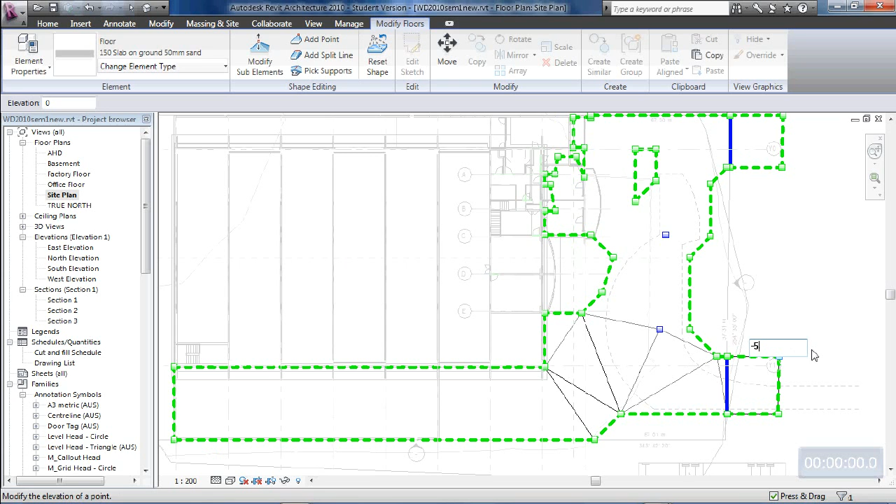I would suspect that the footpath will fall back into the curb of the road to drain water on the footpath in that direction. So just make allowances for that direction to make sure that that sort of happens.

Now, also knowing that this is dropping down a little bit lower, so at this point through here we've got the 99 metre contour, so this is the 98.75 metre contour. We've dropped 250 millimetres at that point there. So this would probably be about a 300 millimetre drop at this point to get to natural ground.

Now we're back on the property, so we don't have to drop by that much actually. I'd suggest that if we're coming at 99 here, you might want to drop down by 100 millimetres or so to this point through here. So I might make that point there a little bit of a drop, but you can make your own decisions on how much you want to fall this. And then we can adjust the earthworks underneath to meet these levels.

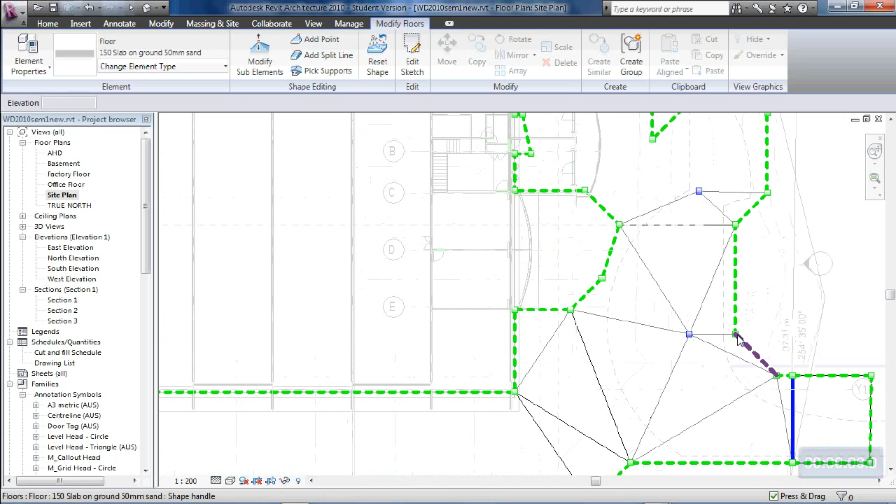So I'm going to carry on and make some changes to these. And the other thing too is that if we're making a change to that point there, then we probably would want this pit to be at least at that level, so the water would fall from the building in towards the pit, and then some of the water can go into the landscaping as well.

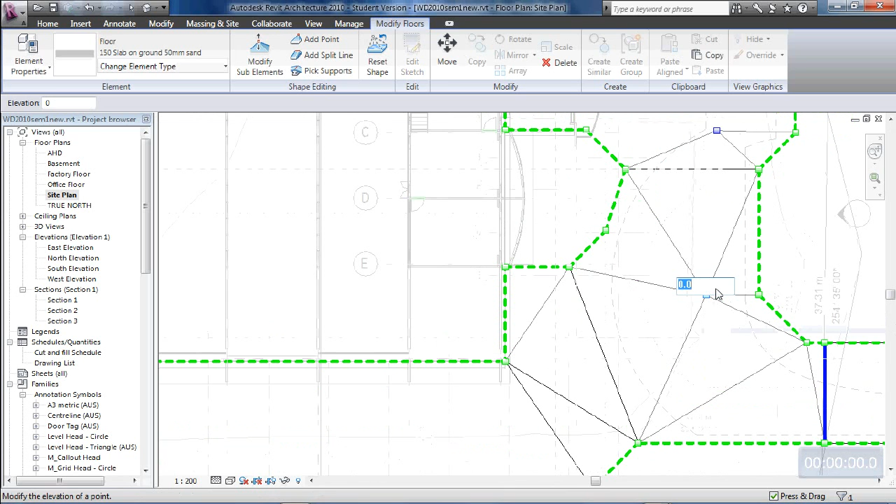So I'll let you make some more decisions about the heights of all those points. I'll pause the video and we'll come back together again to finish off this slab.

Okay, so I've changed all my levels to these points. I just made these couple of points up through here go up to about 100 above, because you can see the 99 metre contour cuts in at that point. So these points here need to be slightly higher to match what natural ground would be at that point. So then I'll drop down a little bit lower to 50 millimetres above, which is quite different to what was going on down here. And so we're just respecting what's happening in the fall of natural ground.

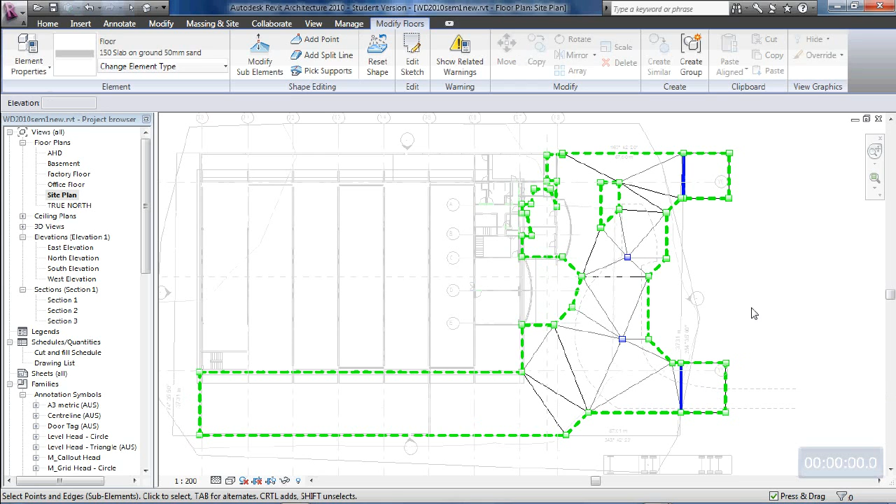Okay, so when you get to that point, you can just back out of all of that by escaping, and you've made those changes to the concrete slab. I'm not too sure if you'll actually pick it up in the 3D view, but possibly you will be able to pick up that this face out the front here is faceted now, and it actually rises and falls in conjunction with those changes that you've made.

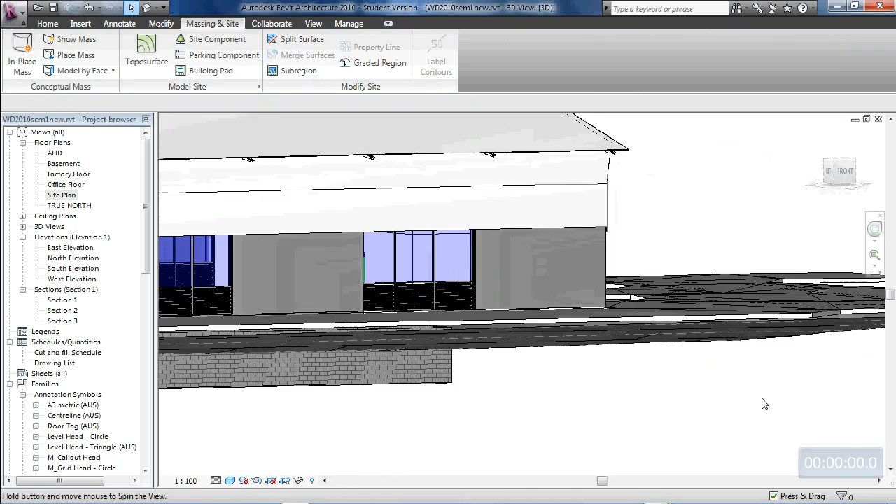These lines that have been created in the slab, we can easily get rid of them for documentation purposes by just using, I think it's under the modify tab these days, the line work tool, and we can pick invisible lines and start making all these faceted lines here invisible. But I'll just leave them on just for now.

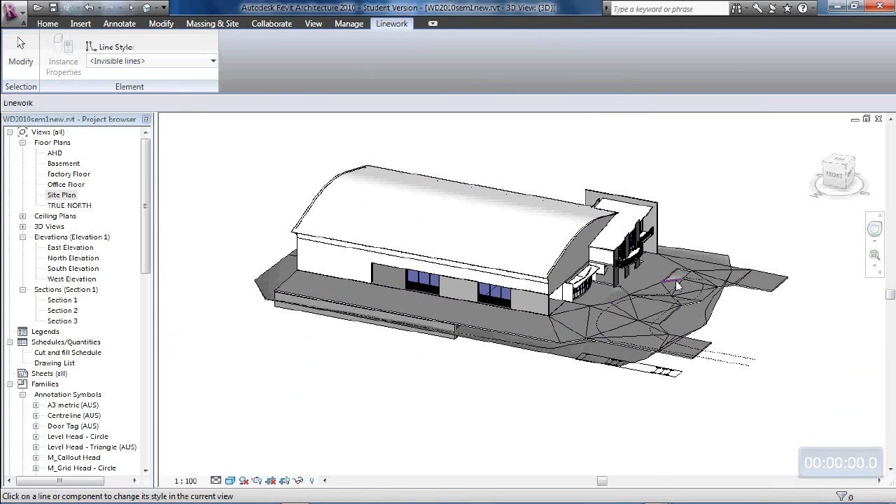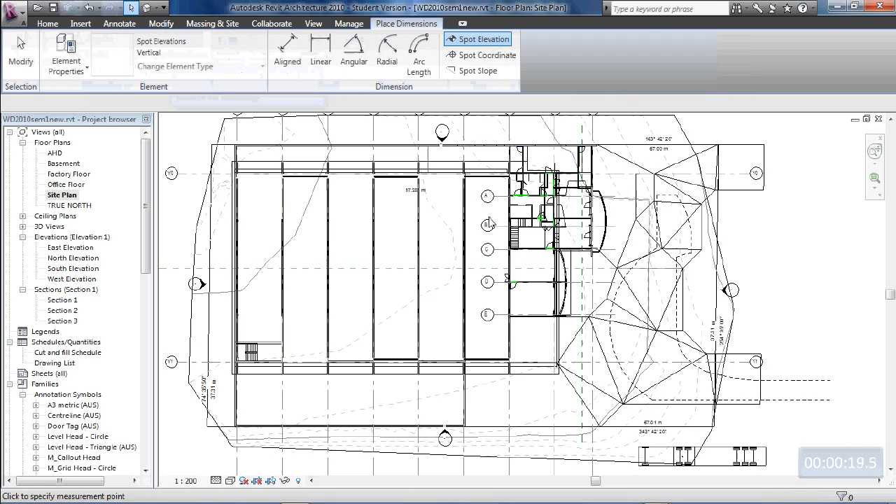At site plan view, because what I need to do now is we're going to start editing the topography somewhat. So to be able to edit topography, I'd like to know what levels I need to bring the topography up or down to suit the concrete slabs in the different locations. So to get ready for that, I'm just going to use the annotate menu, put a spot elevation in, and put some spot elevations at some of these key points, so that when we're working on the topography, it'll remind me of what elevation we actually used.

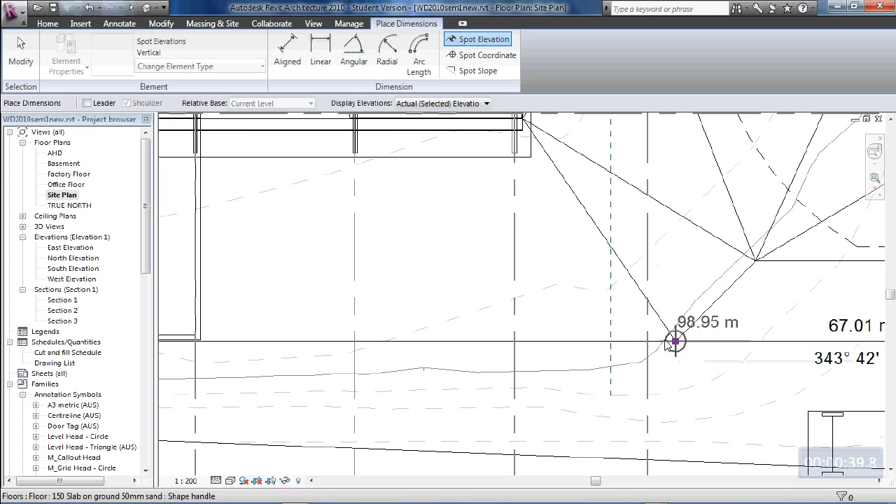Now when you put your spot elevation in, unlike what I've done, if you can put your spot elevation in but uncheck leader, that's probably the tidiest way of doing it. And just put a couple of spot elevations in so that you can remember what the actual heights used in some of these key locations were. Back up at the main part of the building, just somewhere close to the building, we'll put a 99 metre spot elevation in. And then all of the other points we'd need to remember what we actually used.

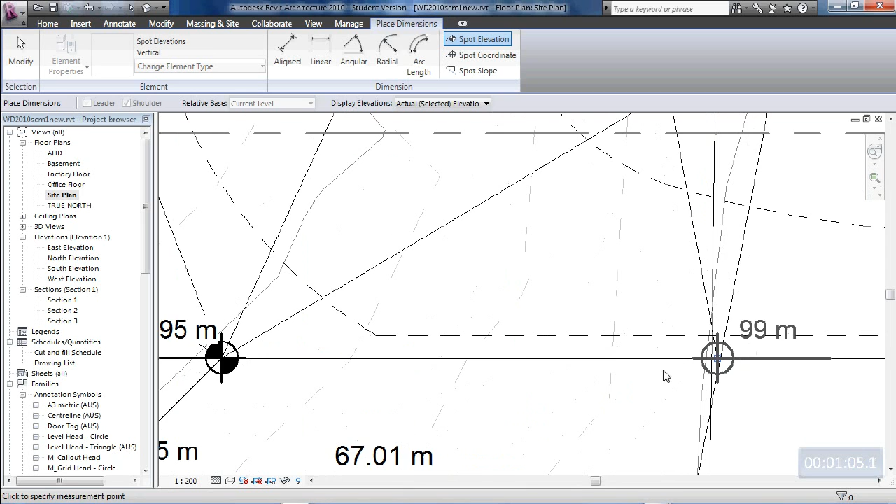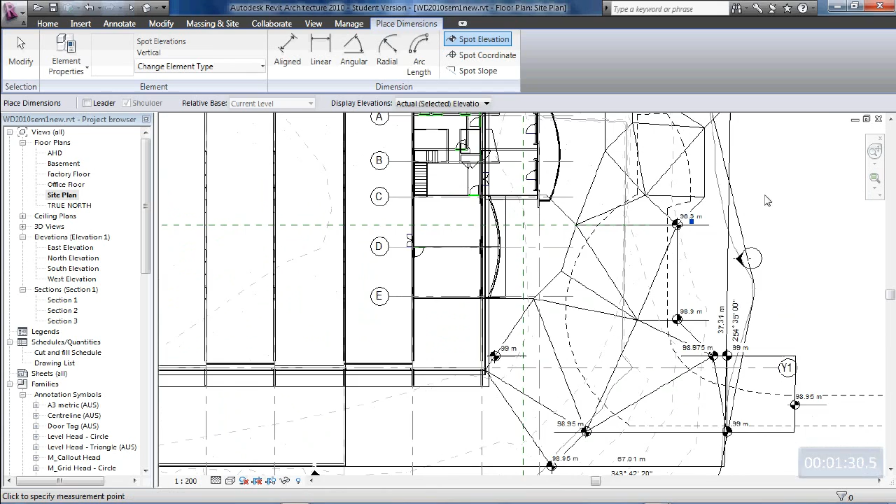So at some strategic points like I'm doing, it doesn't matter if you overdo things at this stage, because we can erase these later, but just for the moment I'd like to remind us of what all of these are. I'd probably go around most of these points and create enough spot elevations everywhere. I'll just finish off mine and then show you where I've done them all to, and we'll pause the video and I'll show you what the effect of that is.

Okay, so I'll just show you what spot elevations I've recorded. You can sort of see from the screen there that I've gone around all these strategic points, not necessarily absolutely everything, but just enough to give you a heads up when you're starting to edit the topography that you know roughly where the levels of the soil need to come to.

So around all these key points, particularly at the front, also these points here where we're going to have our pit drains in there, and I also just reminded myself of the level that I was dropping the slab out to at this boundary area here. So another one of the nominal 99 metre one at that point. So enough spot elevations in that location, but I've also put one in at the factory floor.

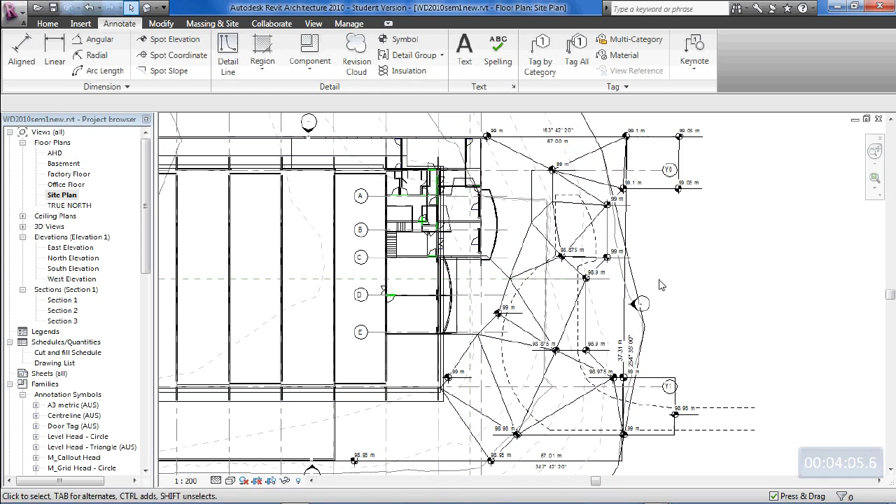So it's in there, the factory floor, so that we know what the level of that slab is, because there's some earthworks to go in front of one of the grid lines there, and also down at the basement. We need to know what the level is at that point. So get all of that done. I'll stop the video at this point, and we'll come back and then we'll start working with the topography.